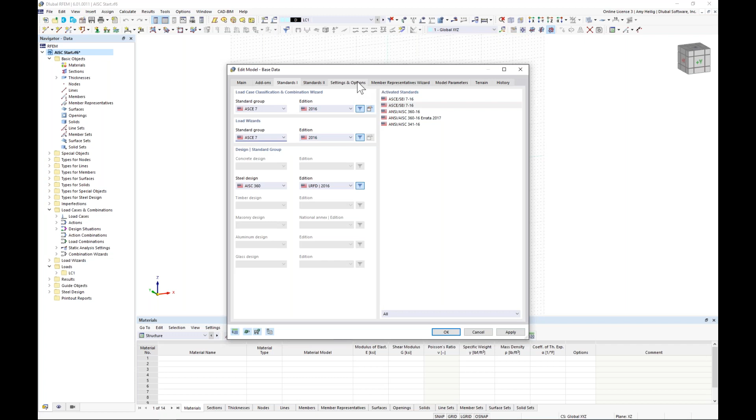Under the settings and options, this is where we can orient our global and local axes. Both are set to upward. I've also activated here the member representative, which gives us the ability to group together members with common materials, cross sections, maybe member lengths. This will come into play a little bit later on.

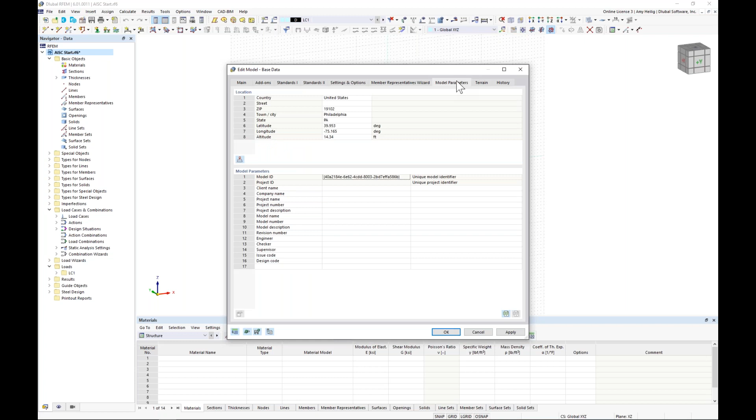Finally, we have this model parameters, which gives us the ability to integrate with our GeoZone tool available on our website. For those of you not familiar with the GeoZone tool, what this does is integrate the various standards, including the ASCE 7, the NBC standard, and many other international standards for snow, wind, seismic, and tornado loads.

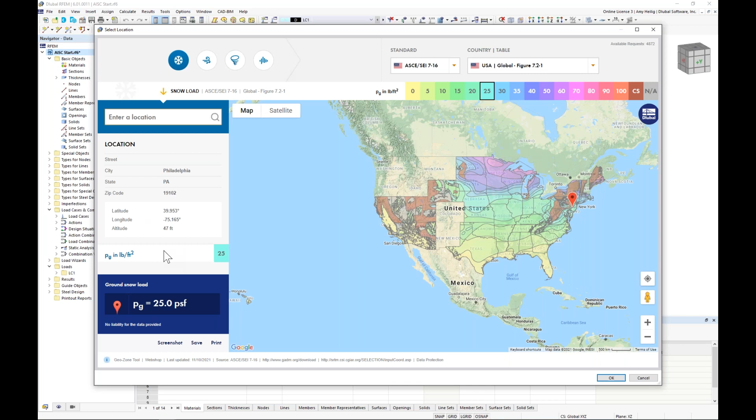This is also further integrated with Google Maps technology, so we can simply type in our project address here. You'll notice I typed in Philadelphia, PA, and I have my ground snow load automatically given to me based on the maps provided within the ASCE 7. This will be used a bit later on for our automatic snow load generator.

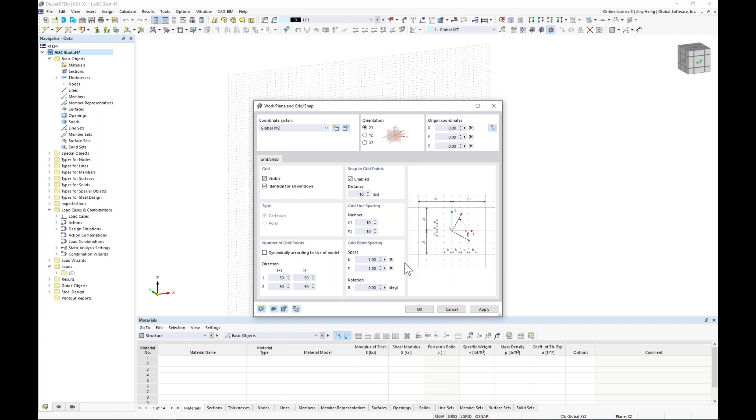Once we have set all of this input, we can go ahead and click OK to be brought into our model. Within our graphical interface, I have my drawing grid activated. Down here at the bottom, I can right click to edit this drawing grid. The grid point spacing is set at every 1 foot. If we see anything other than this, we can always click down here to set the default back to the 1 foot spacing.

We'll begin by drawing our first member, going up here to our toolbar to draw a new single member. The member type will be set to beam. The section will be defined here within my cross-section library, so I can go ahead and activate my standard steel sections, and we'll use our filters over on the left to filter to the United States, the AISC 15.

And the W sections are now available to us here, where we can scroll down and choose a W14 by 48. So once I have my cross section selected, I need to create a new material.

In a similar manner, I'll open up my material database. I can again use my filters on the left to choose the United States, the AISC 360, and we see steel A992 available to us, which we can click OK.

Now this material is available for all members within the model. I don't need to redefine that material each time, I can just select it here within this drop-down box.

Once I click OK, I'm going to go back to this main tab here and deactivate the design properties. This is specific to steel design according to the add-on we previously activated, so we'll get back to this later, but for now I want to deactivate this option.

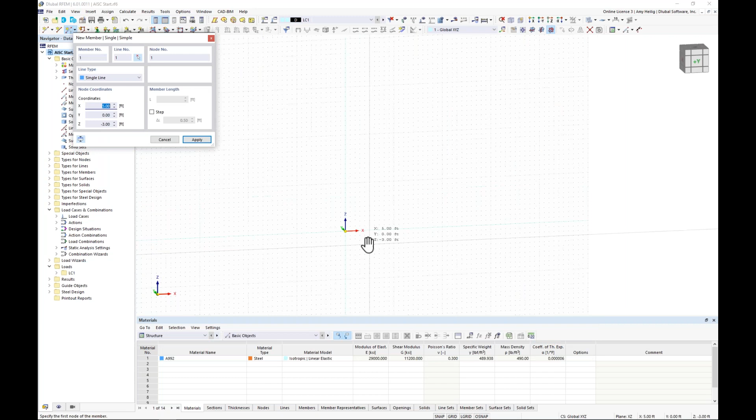We'll begin with our first column by snapping at the origin here and a point 14 feet in the global Z direction. My second point is going to be located at x equals 40 feet, and then we'll go ahead and choose again that same point of 14 feet in the Z direction.

Now I'd like to create a node that's really right at the center of these two nodes at the tops of my columns. For this, we have a nice feature within our drop-down box where we can create a node between two adjacent nodes.

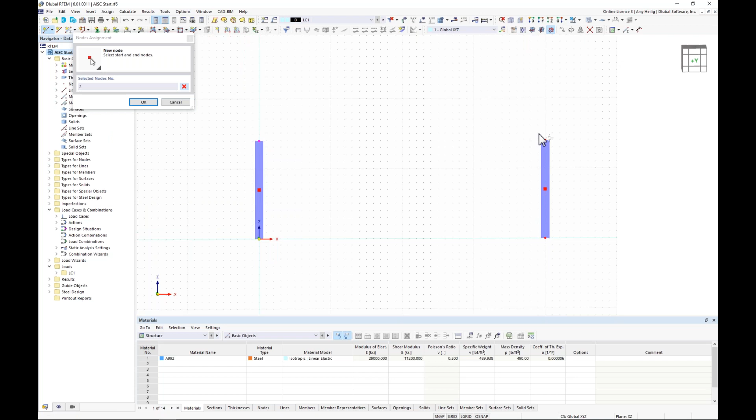So what we can do is graphically select the nodes at the tops of my columns. When I click apply, you'll notice we get a third node generated here. This node is really dependent on these two nodes that we've selected graphically.

I can even take this column and move it around and you'll notice that node moves with it. We can also take this node, double click on it, and you'll notice the node type is set between two nodes. If we want to edit it, we can simply change this back to standard and I can modify my Z coordinate to 16 feet in the vertical direction.

So we're now ready to generate our beams for our first moment frame. I'm going to go to draw a new member once again, and I'm going to deactivate the design properties.

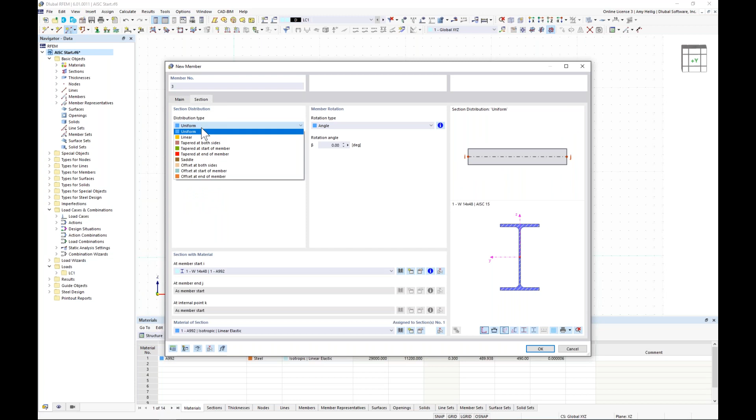Under the section, I'm going to choose under distribution type, tapered at the start of the member. Previously in RFEM 5, if we had any type of taper, we had to completely create a new member segment. But in RFEM 6, we have the ability to integrate this taper directly within this single member element.

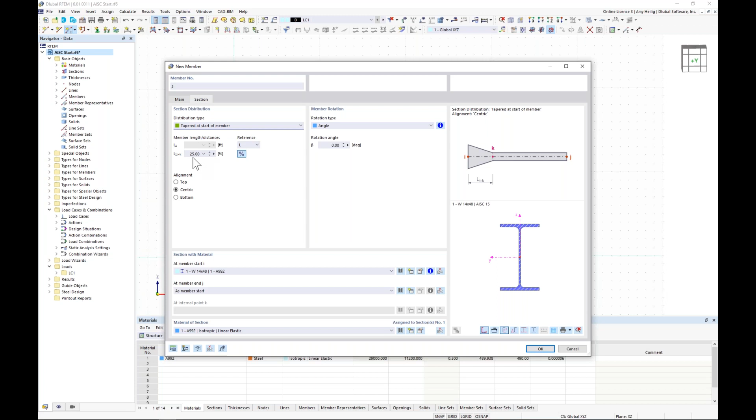We can set the member taper length, set at 25% by default. We can additionally set the alignment, so if I set this to top, notice that the top of member is completely flush here.

Well, we do need to create a new cross section. For my member, I'm going to go back to my W sections and scroll down to a W12 by 26. Remember, I don't need to define the A992 material again, it's already available to me here, and I click OK.

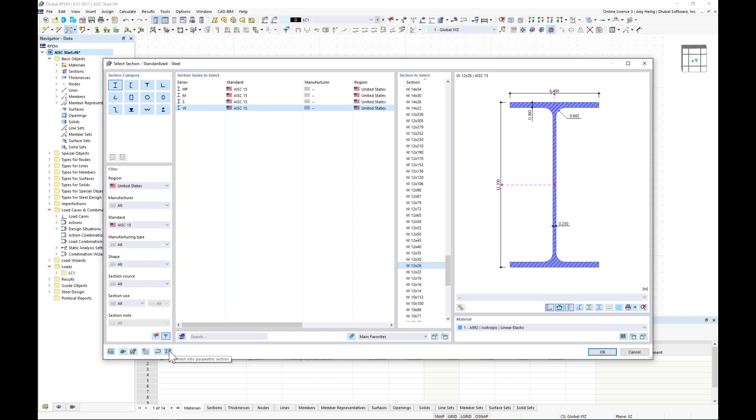But I also need to create an additional cross section for my taper start. So I go back to my cross section library and choose again that same W12 by 26, but we have a feature in the left corner where I can convert this into a parametric section. When I click this option, it imports all the cross-section properties from that W12 by 26, but I have the ability to modify any of the properties here, such as the depth, to 24 inches.

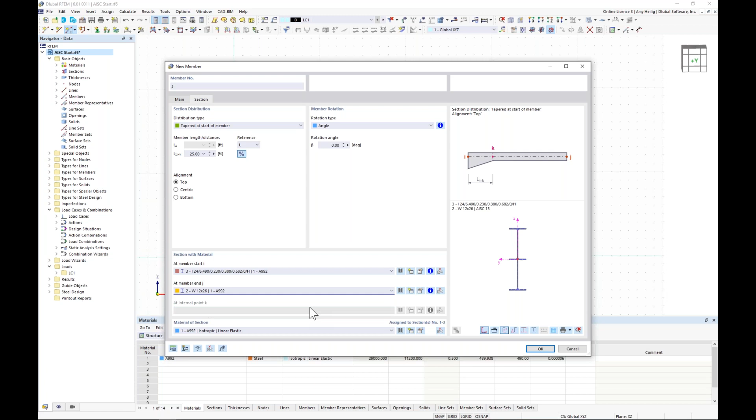I click OK, and once we click OK through this additional dialog box, we can set that parametric section as the member start, but at the member end I want to choose that W12 by 26 I previously defined. When I click OK, I start at the top of my column, and my second point will be up to that center point. I do the same thing on the right-hand side, and now we can see those beams generated with the taper available to us here.

These color codings are the member representatives. I'm going to turn those off for now, we'll get into them a little bit later. I'm going to highlight all of my member elements here.

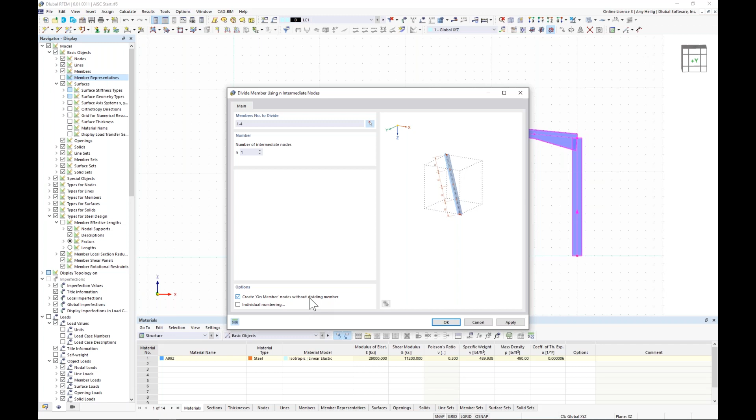I'm going to right click, and under the members option, I have the ability to divide the member by a set number of intermediate nodes. I'm going to create one intermediate node, and I'll choose the option to create the node along the member without actually dividing the member.

So that node will now be integrated as part of the member element itself. I click OK, and if we turn this into wireframe view, we can see these nodes in a different color, blue here, generated at the midpoint of each element.

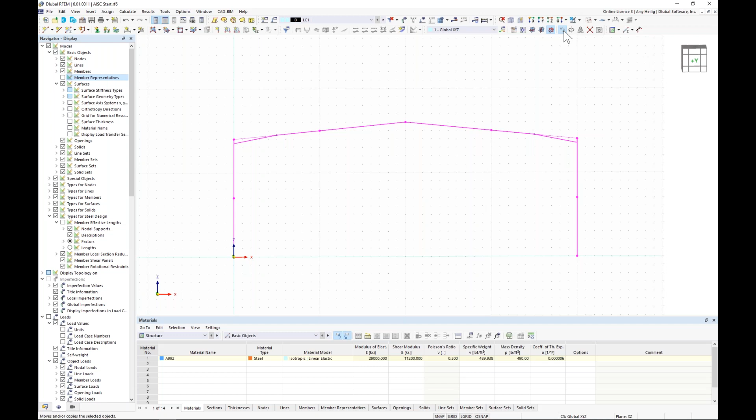I'm going to highlight all of my elements here, including those new nodes, but I'll hold down my shift key to deselect the nodes that define where the taper start should begin. I'm going to utilize my move copy tool and create a copy. We'll create 3 total copies in the global Y direction of 16 feet.

Under the numbering and options, we have the ability to turn on the step links. When we do this, we get a new tab that allows me to create members between copied nodes. So this is just a little bit of a time saver here.

Now, if I don't have the available cross-section I'd like to use, I can simply create a new one. This brings us into our familiar dialog box for creating a new member element. Turning off the design properties, the member type here is going to be truss. A truss applies that moment release at either end of the element, so internally you can see this hinges option is now grayed out.

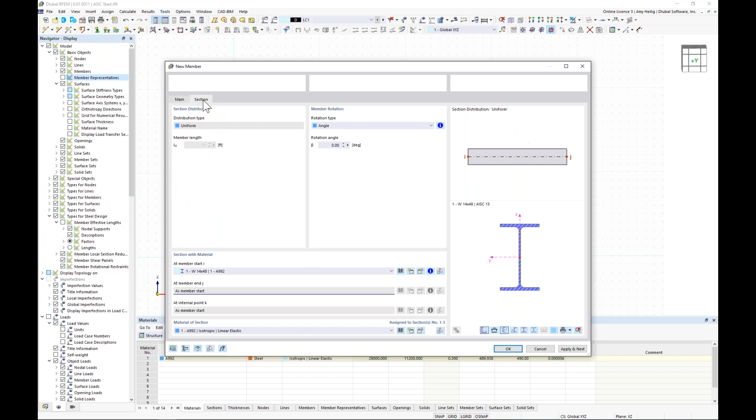Under the section, we will create a new cross section, and we'll go into our cross section library, but this time we'll choose an HSS. We choose the square HSS, and we'll scroll down here to 6 by 6 by 0.375.

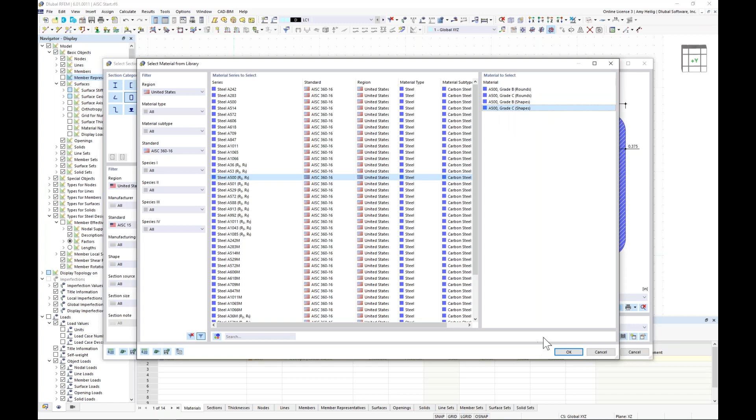Now I do need to create a new material, so I access my material database, and we simply choose steel A500, and I'm going to choose A500 grade C for shapes on the right-hand side. I click OK through these dialog boxes.

And remember, we're still in this move copy tool. So once I click OK, what I should see here are those HSS elements generated between those copy nodes.

Now, one thing I want to do down at the bottom is hold down my control key to select all of these bottom HSS elements. I'm going to double click, and I'm actually going to change the member type here to coupling hinge.

So this is actually some type of rigid element here. The stiffness is very high. We don't need to specify a cross section or a material. All of that's handled internally with a very high stiffness, and a hinge is simply going to release the moment at either end.

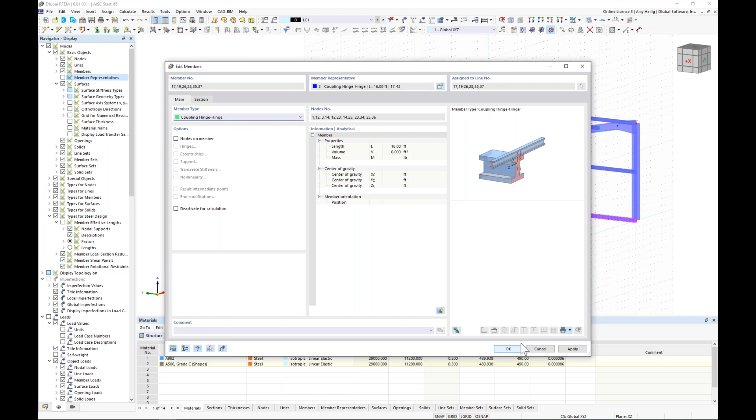The reason why I'm doing this is we will be defining surfaces for the facade walls for the entire structure, and I want all of the loads at the lower part of the structure to be transferred back to the bottom of my columns and into those foundations. We'll see that once we generate those surfaces.

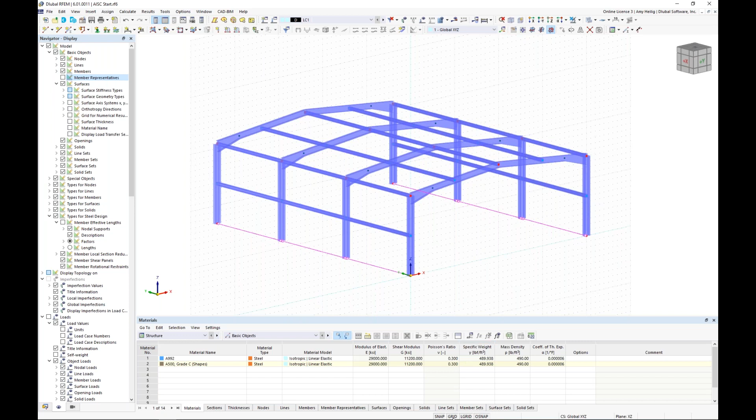So I'm going to continue on here to draw my X bracing now. I will go ahead and draw a new member once again. The member type now is going to be tension only.

Tension only again is going to apply that member hinge at either end, and additionally, if there's any compression within this element, it will be completely removed from the calculation, so it can only take tension forces.

We'll turn off the design properties, and under the section tab, we create a new cross section. I could either choose that here under my parametric bars for my X bracing, or additionally, we have bar sections here according to the AISC. Same concept.

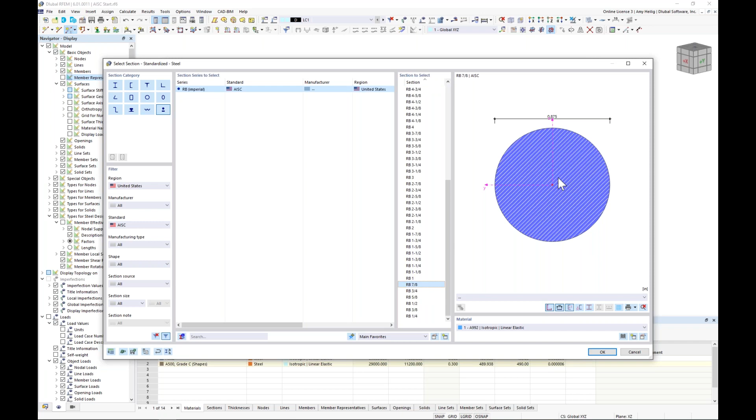This allows me to choose a 7/8 inch diameter round bar. Creating one more material type, I do want to select A36 for this element.

So once I click OK through these dialog boxes, what I can do here is turn this into wireframe view, and I can snap from one corner point to the other. You can see I slightly missed that one, but no problem, I'll fix that in just a minute. And then we can do the same thing up here at the top of the structure.

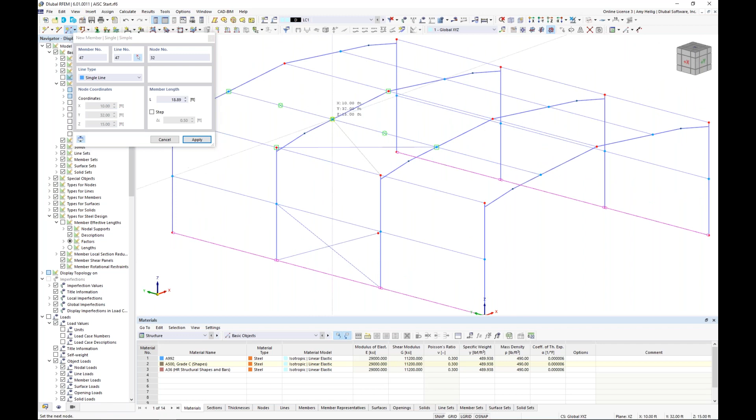Fixing this point up here is really just as easy as dragging and dropping, and that will snap to that point. Now selecting this lower X brace, I can hold down my control key to drag and drop and make a copy here as well.

Now we can do the same thing at the top. I hold down my control key, drag and drop, and make a copy. Additionally, I can select all of my braces here by holding down my control key on the left side.

and take advantage of my mirror tool. The mirror tool is similar to something we'd see in AutoCAD, where we can create a copy. We'd like to mirror about the YZ plane, and I'm going to choose my mirroring point, which will just be right here at the center of the structure. And I click OK, so now we can see that X brace generated on the other side.

It looks like one was additionally forgotten here, but no problem. We'll go ahead and drag and drop that down to the bottom element there.

Now that our X bracing is complete, I'd like to finish the front and rear of this structure with additional columns and wall girts. We'll turn back on our drawing grid, and I'm going to snap the drawing grid origin to a new location, which I can do with this option up here in my toolbar. I choose this point where my HSS intersects this tapered girder here at the end.

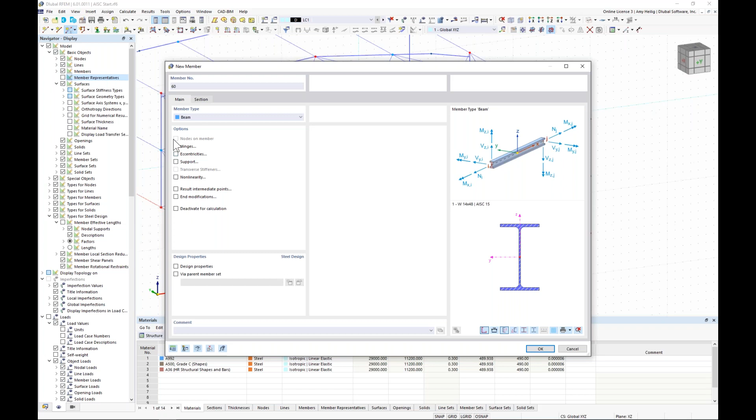My additional column will require me to generate a new cross section one last time. We'll turn off the design properties, and I'm going to turn on my hinges here. Under the section, I'll go back to my cross section library and choose a smaller section, a W8 by 31. A992 material is good. I click OK.

Now, under the hinges tab that we've activated, everything for a beam element is considered fully fixed. So if we'd like to apply a moment release, we need to create a new member hinge at the member end. I go in here to create a new member hinge type.

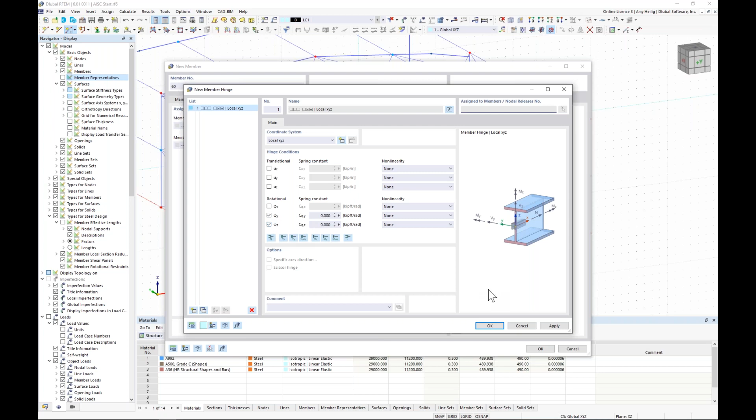We can see our six degrees of freedom. The program automatically assumes we'd probably like to release the moment about the local Y and local Z axes, so I can go ahead and go with that suggestion. Now this member hinge definition type is always available for any future members within this model.

I do not need to redefine that here, but rather just select it from my drop-down box. Once we're done, I click OK, and I'll snap from the bottom of the structure up to the top. So this is my front-facing column here.

I'm going to take these two elements, hold down my Control key, drag and drop to make a copy. Now, of course, we want to snap these members to this column that I just created. What we can also take advantage of is our object snap settings.

So down here in the lower right corner, if we right click, we see a lot of options, again similar to what we'd see in AutoCAD, including the perpendicular. This allows me to take this node here, and the program will automatically detect the perpendicular point and allow me to snap exactly to that element.

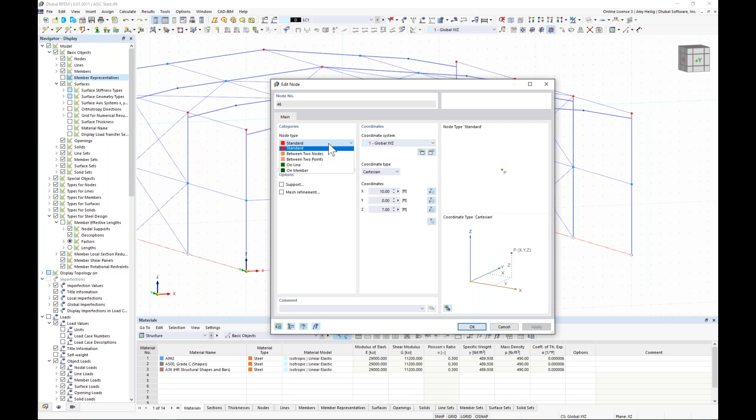Now for the bottom girt element, it's really just as easy as snapping to that bottom node. But we have one small problem here: this node is not detected along this member length. So we can simply fix this by double clicking on the node and changing the node type to on member.

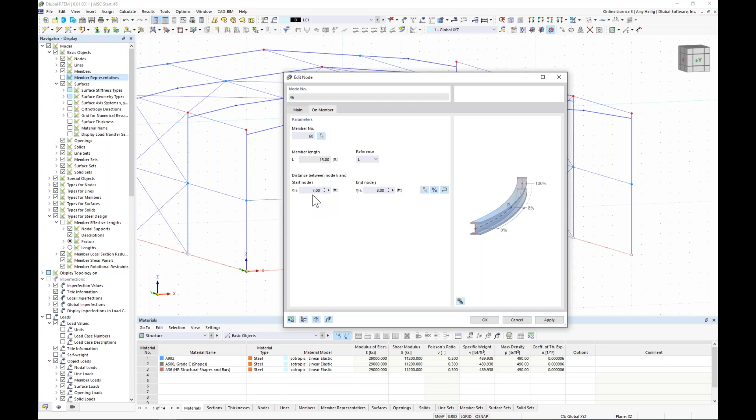On the second tab, the program tells me okay, we'll go ahead and choose the member it's associated with, so we'll choose graphically member number 60. Then I want to tell the program graphically as well where this node along the member should reside. We can see here that is set at 7 feet. I click OK, and now that node has changed color to blue.

I can take all of these elements and make additional copies here for the front of the structure. And I'll go ahead and take these two final elements, hold down my Control key to make my last copy.

Now up here, we do need to connect this column up to the node, so we just drag and drop and everything is complete at the front of our structure. Now I'm going to highlight all of these elements here, including the nodes, the rigid elements down at the bottom.

I hold down my Control key, and I can drag and drop to make a copy at the rear of the structure.

So most of our member modeling is complete, but now what I'd like to consider are our facade walls. I'm not interested in modeling these facade walls with a set material and thickness and designing them. I'd rather use them to transfer loads back to my members.

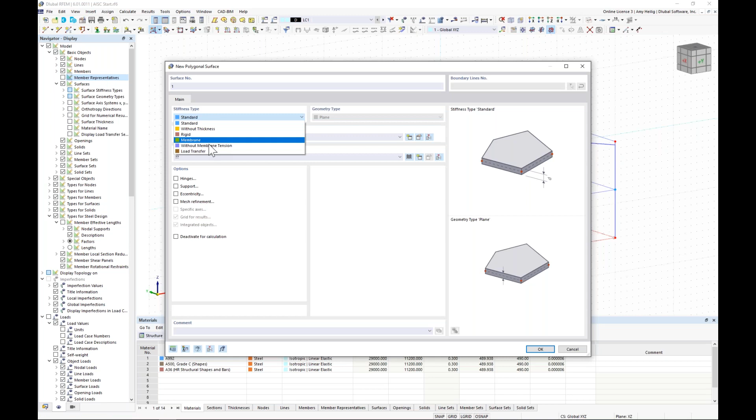So we have a new feature within RFEM 6 where if I use my drop-down box to draw a new surface, I can choose a polygon. The stiffness type can be set to load transfer, so notice I'm not going to be able to select a material or a thickness. It's really only used for load distribution.

Under the second tab is where I can select whether this is one-way or two-way area load distribution, based on the local axes of this surface. So we'll go ahead and select one-way area load distribution in the local X direction.

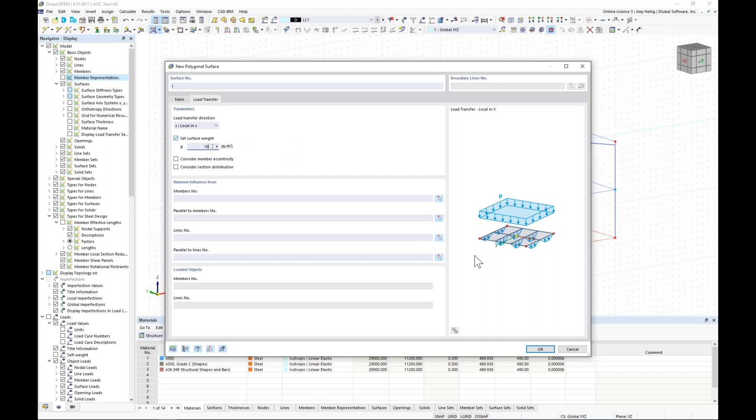Additionally, I can set a surface weight for these facade walls. If I want the self weight to be considered within this model and within the static analysis, I can go ahead and set 10 pounds per square foot for this new surface type.

So what I want to do is snap to the coordinate points of my surface for my front wall. I'll turn off my drawing grid at the bottom to make this easier. Currently in a rendered or wireframe view, it's a little difficult to see these surfaces - you'll notice only a dotted line is created. Every time I'm closing the surface with that final point, I just double click.

We'll go ahead and generate the surface at the left side of the roof here, and then we have one more surface to generate at the back.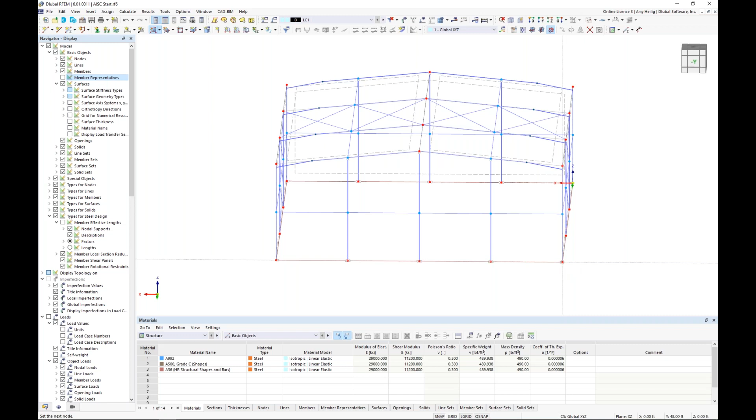Once we are complete with this, just to give you a better sense of what's going on, we can turn this into a rendered view. Here are all of these surface elements, again with no stiffness, just being used for load distribution.

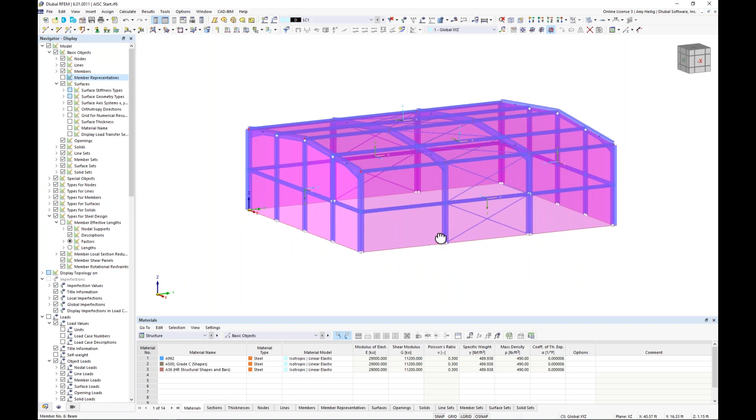I also like to right click and turn on the local axis system of the surfaces, because I'm choosing a one-way area load distribution. I wanted to ensure all my local X axes are in the horizontal direction, and they are. So we can right click and turn off that local axis system.

The final thing to do is to support the structure. So we go up here to a new nodal support. Within this option we have several defaults, such as a pinned support, a fully rigid support, roller supports, or we can always create our own.

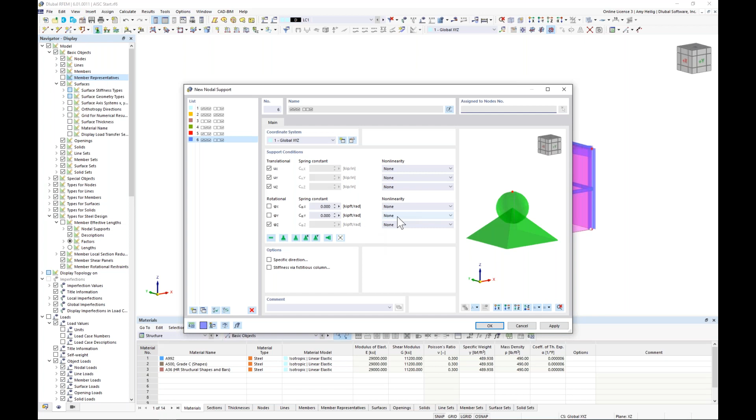When we create our own, we have 6 degrees of freedom, 3 in rotation, 3 in translation. We can set partial fixity with spring constants or non-linearities. So let's say we want it to fail in uplift - this is possible, along with sliding and friction. We can define those with non-linear options.

For today, I just want to choose the default pin option, and I click OK. This allows me to highlight over the bottom of all my elements to apply that nodal support at the base of each column.

I can also right click on these supports, and you'll notice we have a nice slider where we can decrease and increase the size. Once those supports are generated, our modeling is really complete.

So I want to move into the definition of the load cases themselves. We go up to edit our load cases, and you'll notice we already have a default load case set. I'd like to give it a load case name of dead load, and self weight is automatically turned on - the self weight of our members, and remember we set that self weight for our facade walls, for the load transfer surfaces.

The action category here is set according to ASCE 7, so the program knows which load factors to apply to each load case. We leave this one as dead load. We create our second load case, snow load, with the action category of snow - notice self weight is turned off here. And we create our final load case, wind in the positive X direction, with the action category set to wind.

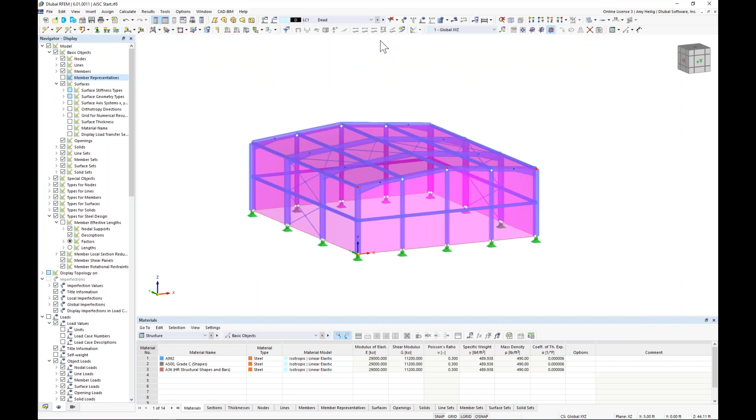So we've generated these 3 load cases here within our dropdown, but we actually need to apply the loads to the structure. For my dead load, I really don't want to apply any additional loads other than self-weight, except for pre-stress of these X-brace members.

How I can do this is to go into my project navigator, and we have a nice feature here within the Views tab that allows me to select members by type graphically, and I can choose my tension-only members. Notice everything else is grayed out, and this gives me the ability to select all elements here, which will be only my X braces.

We can begin by drawing our first load within the structure. I'll go up here to draw a new member load. The load type is going to be axial displacement for that pre-stress, and the load magnitude will be negative 0.01 inches in the local X direction. When I click OK, that load is automatically applied to all of these tension-only members, and we can see that graphically shown to us here.

So once we're done with the dead load case, we want to move on to snow load. And I previously mentioned that we do have our snow load generator available to us according to the ASCE 7. This can be seen under the load wizards tree within our project navigator, and we'll see here snow loads, which I can double click to create the snow load generation.

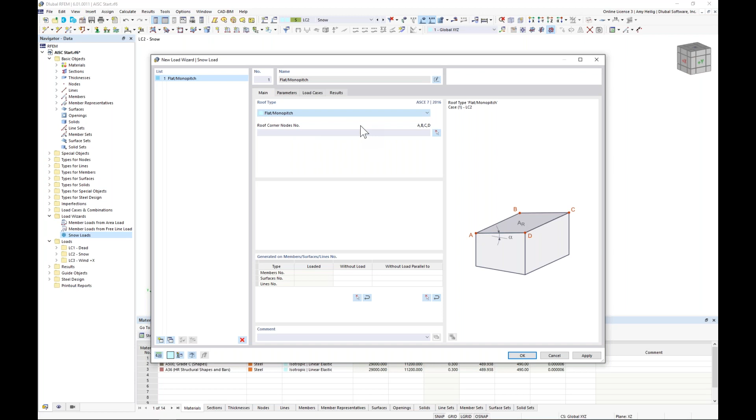Now, the roof type can be flat, monopitch, or dual pitch. Anything outside of this basic rectangular shape, these snow and wind load generators cannot be used, so you will have to manually apply those loads instead. But for today, our structure does fall within this geometry.

So then what we can do is to select the roof geometry graphically here. I go around and I pick each of these 6 points. I double click for my last point, and now the roof geometry is recognized here within this dialog box.

Under the Parameters tab, remember we have already set the project location according to the GeoZone tool back when we first created the model. So inevitably the address is shown here, but we're also bringing in that ground snow load directly from those ASCE 7 maps. So nothing to do further here.

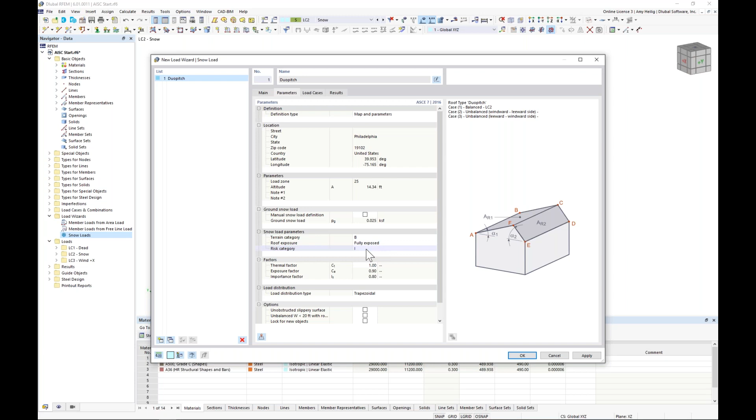Now I may want to make some adjustments according to the terrain category, the roof exposure, or the risk category, because as we know, this is going to affect the magnitude of my snow loads. We'll just go with the default options for today.

And under the third tab, we have the ability here to generate the balanced snow load cases, but also unbalanced. So for our simple example today, we'll just create the balanced snow load. The program is intelligent enough to go ahead and place this under load case 2 for snow load.

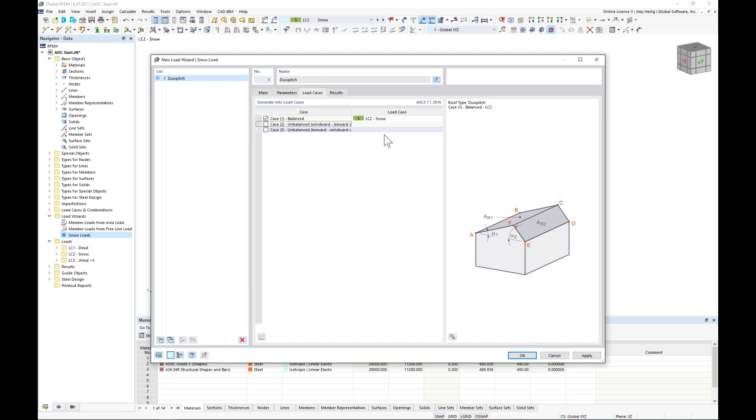So when we click OK, what we should see now is a new generated load at the top of our structure. We can right click to display this load separately, and under my project navigator within the display tab, up at the very top here, I have my basic objects for surfaces, and here is where I can turn on the display of the load transfer separately.

So the surface load is being applied to those surfaces. When I turn on this feature, the program's showing me based on the tributary area how exactly that load is going to be distributed to each of these moment frames. And by the way, we can also go back to the dead load to see the same concept for that self weight of that 10 pounds per square foot that we applied to all those surfaces as well.

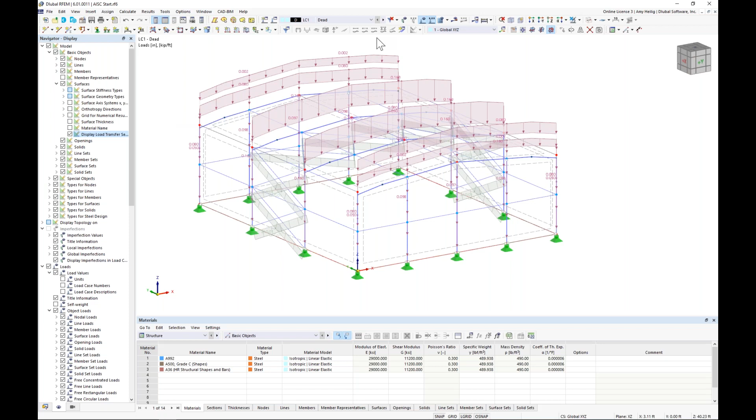So now we are complete with our simple snow load case. We'll move on to the wind load. And as mentioned, the wind load is still in development according to the ASCE 7, so it's really as easy enough as applying some simple surface loads here to represent that wind in the global X direction.

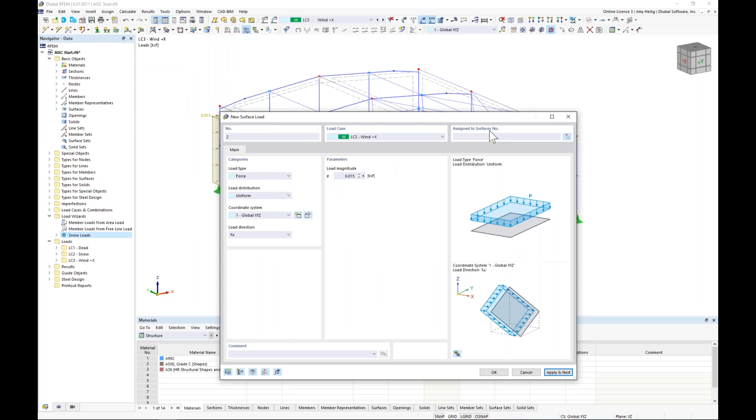So we'll start off with a new surface load up here in my toolbar, and we want to set the load magnitude as 0.015 kips per square foot in the global X direction. We can see my global axes down here in the lower left. Now I want to assign this to my first surface over on the left, surface number 4. If I hit apply and next, notice I'm still within this dialog box, but that load has been applied in the background.

So this gives me the ability to modify my magnitude for a small section force, but I'll apply this at the rear facing wall here. I click apply and next. We should see that load generated in the background.

I further adjust my magnitude to negative 0.008 kips per square foot, but this time in the global Y direction. I'm going to choose this front-facing surface for an interior section load as well. I hit apply and next. We just remove this negative sign for my surface in the back. I click OK, apply and next.

Now the final load is going to be the same magnitude, but this time we want to change the coordinate system to the local X, Y, and Z axes. So this will be applied based on the local axes of my roof surfaces here. Since they are at an inclination, I want this wind load to be normal to those faces. So we set this according to the local Z axis for these surfaces, and then I can graphically select the 2 roof elements here. I click OK, and now we're finally done with our wind in the X direction.

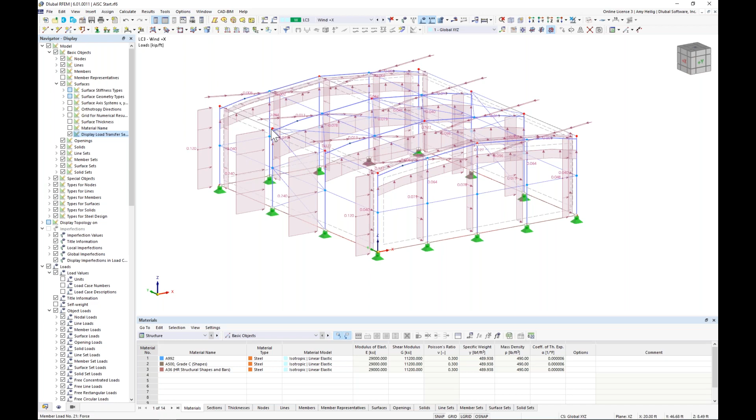Now again, we can go back to displaying the load transfer separately here. This is just based on the tributary area of all of our elements, since those are surface loads applied to the surface load transfer elements.

Okay, so now that we are done with wind in the X direction, I'm going to go back to my project navigator, and I can view my load cases within my additional tree settings here. So I expand out the load cases and I see dead load, snow load, and wind in the X.

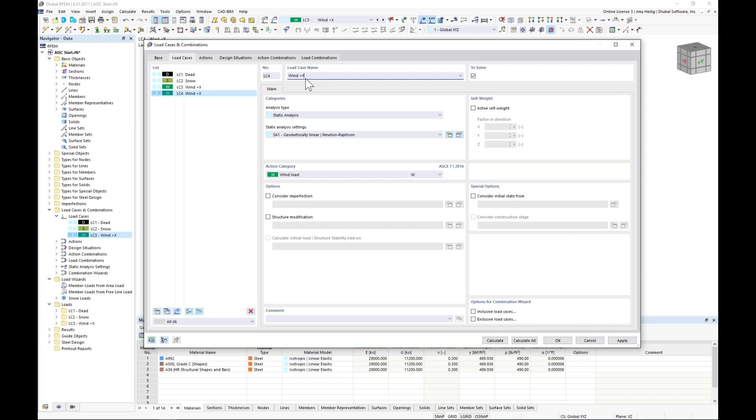Well, I can right click on wind in the X and choose this quick option here to copy the load case. Immediately my dialog box opens up, which we've seen before, and I can just change this to wind in the Y direction. The benefit of this is that wind in the Y direction has also copied all of those same surface loads, so I don't need to redefine those.

All I need to do here is adjust the magnitude. Now I could adjust the magnitude by clicking on each one of these surface loads, or we can also take a look at our load input data directly within our table options down here at the bottom. So I use my drop-down box to select loads, and I'll find surface loads down at the bottom.

So under wind in the positive Y direction, I just want to make some small changes here to my magnitude: negative 0.008 for my left facing surface. We'll go ahead and change this to positive 0.008 for the right. Now this front facing surface, this is where a majority of my wind load magnitude comes from, so we set this to 0.015 in the global Y. And then we're going to modify the rear surface to 0.006.

Nothing to do further with my roof elements, those we can leave as is. So essentially all of our loading is now complete for our 4 different load cases that we have available in our drop-down box here. So now the next topic to discuss, we'll jump back to the PowerPoint here to turn back to the AISC 360 Chapter C, Design for Stability.

And within this chapter, section C1, there are 5 requirements listed. The first is flexural, shear, and axial member deformation. The second is that second order effects, including big P delta and little p delta, must also be accounted for when we're designing for stability. Geometric imperfections should be included, as well as stiffness reduction due to inelasticity, and finally, uncertainty in stiffness and strength.

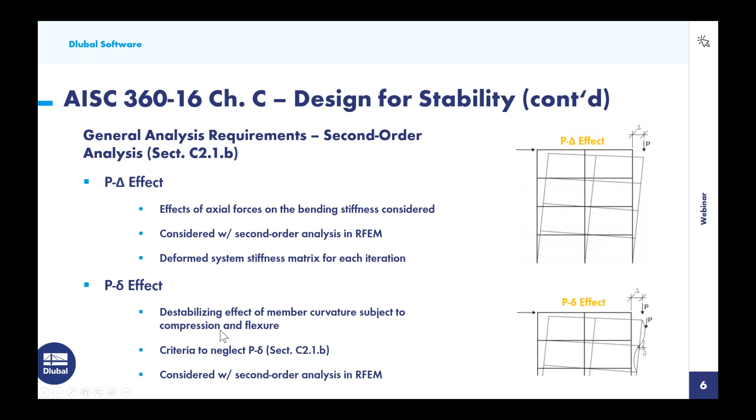I'll show you in a minute how we can apply those settings, but let's continue with item number 3, the consideration of initial system imperfections according to section C2.2. When we're talking about buildings, this is primarily column out-of-plumbness. Member out-of-straightness doesn't need to be addressed within chapter C for instabilities because it's already considered within chapter E when designing members for compression.

There are two approaches for considering imperfections. The first is direct modeling according to section C2.2a. The code tells us we can physically model these initial displacements due to loading and anticipated buckling mode shapes. The magnitudes are based on tolerances set forth within the code of standard practice or on the known imperfection itself. So if we wanted to alter the geometry of our model to account for those initial displacements, that is one way to handle imperfections.

Probably the alternative and easier approach is the use of notional loads, given to us in section C2.2b. The equation directly from the standard is 0.002 alpha times Yi. Alpha just depends on whether we're going with LRFD or ASD limit state design. Yi is the factored gravity load at that particular level. From this equation, we calculate the notional loads that should be applied at each level.

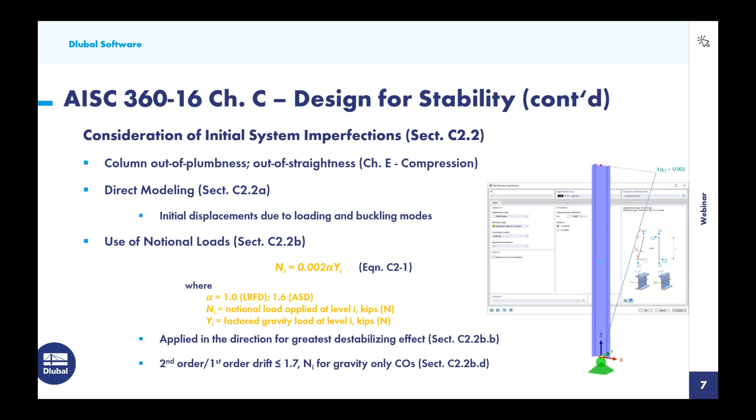Now, the final topic here is item number 4, adjustments to stiffness in section C2.3 to account for inelasticity.

The first requirement is to apply a 0.8 factor for axial and flexural stiffness. Now, this should be applied to all members that contribute to the stability of the structure, but the code goes on to say, well, in order to avoid artificial distortion, just go ahead and apply this factor to all members within the structure.

Similarly, we have an additional tau sub b factor that should be applied to the flexural stiffness only. And tau sub b is a little bit more complicated. We can see the equations listed here, again, directly from the standard.

Tau sub b is dependent upon the required factored axial compressive strength, or what is the demand normal or axial force within the member from the analysis, but also what is the cross-section compressive strength, or what is the capacity of the member. Depending on what this ratio is, if it's less than or equal to 0.5, then it's easy enough to set tau sub b equal to 1.

Now, when this ratio is greater than 0.5, we have an equation that we need to follow here to correctly calculate tau sub b. And furthermore, what's new within the 2016 is that we do need to account for both non-slender and slender elements. This does affect which area we'll use here, whether it's the gross area or the effective area.

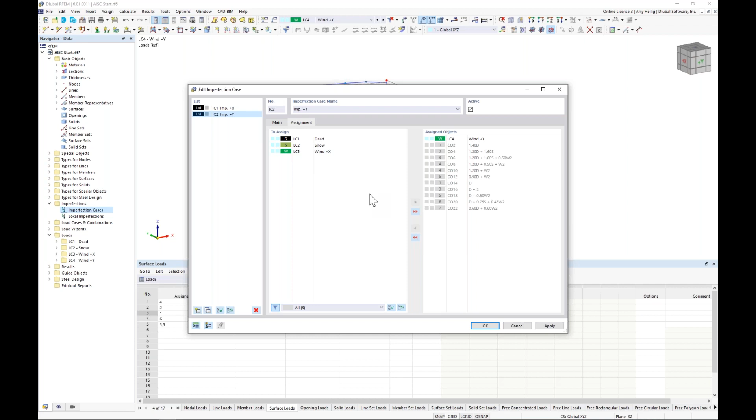So now that we have generated these imperfection load cases, we actually need to apply the imperfection to the structure. So we can do this by go ahead and clicking OK here. And before I do, I'm going to take advantage here again of my visibility options to filter the members by cross section.

And I'm going to choose my vertical elements here in the vertical direction. So you can see my W14 by 48 and W8 by 31. Now I can also right click to turn on the local axis system of the elements because this is important for my imperfections. So under my imperfections tree here, we can now see that we have imperfections in the X and we have imperfections in the Y.

So under imperfections in the X, I'm going to right click to create a new member imperfection. And under the definition type, sure enough, we have available here the AISC 360-2016 standard.

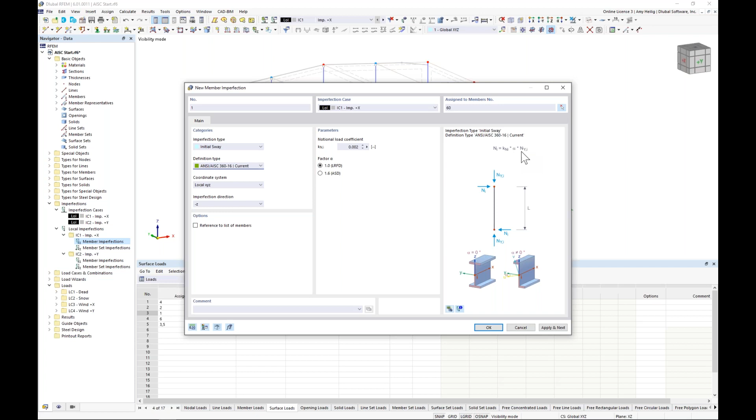And we're going to see that exact equation that I showed in the PowerPoint given here of 0.002 times alpha times yi. Now we want to apply these imperfections in the global X direction, which relates to the negative local Z axes of all of my members shown here.

So then I can graphically select, let me pull down this table. I can graphically select here all of my vertical members. I click OK, and now we can see all of those populated here. I can click apply and next.

Now I can choose under my drop down here imperfections in the Y, and all I need to do is change the imperfection to the positive local Y axis. Again, that's going to correspond with the wind in the global positive Y direction. I'm going to graphically select all of my vertical elements here once again. I click OK, and I can click OK once again.

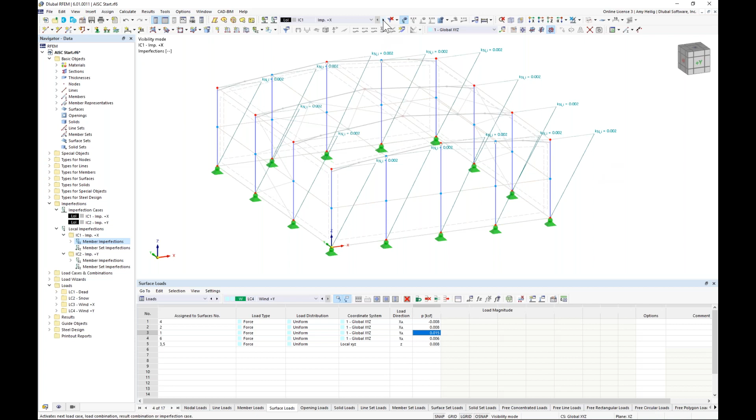Now, what we can see when I turn off my local axes is our imperfection cases available in our drop-down box now, and we can graphically see these by turning on the imperfections up here in the toolbar. Here is our column out of plumbness, or our notional loads applied in the X direction, as well as applied in the Y direction.

So once those imperfections are applied, I just want to go into a little bit more detail about how the imperfections should really be applied to each load combination, because this can be a little bit complicated. So let us jump down to, let's say, our dead load here, and we can go into our load cases and combinations, which we've been here before.

But under the design situations, the program is automatically generating two design situations according to the ASCE 7. We have here our LRFD design situation, which is going to be our factored load combinations, and ASD, which is going to be our unfactored load combinations.

Now, within the LRFD design situation, you can see here it's active for steel design. So I'll be using this for the steel design add-on according to the AISC in just a minute. We have these options down here specific to each design situation. So I'm going to go into the edit detail settings.

It's important to know that all of the direct analysis method settings that we talked about in the PowerPoint are all controlled within this dialog box. So that's kind of nice that we don't need to jump around to all different areas of the program, but we're going to set everything here.

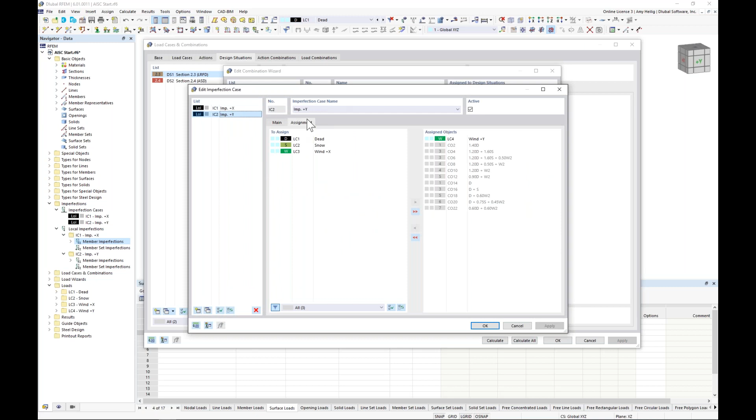The first is to turn on the imperfection cases for my factored load combinations. You can see that's automatically checked on by default. If I go into this edit button, this just brings me back to the imperfection cases that I've already seen before. So imperfections or notional loads are now taken care of.

Let's move on to a second order analysis accounting for big P delta and little p delta. Well, that's really just as easy as using this drop down box here. We see here linear analysis, but we want to set this according to second order P delta. So now big P delta and little p delta will automatically be accounted for all of my factored load combinations.

Now, the final topic is our stiffness modifications, and we can activate this here with the structure modification. Now, I do want to create a new option here, and I'm going to activate the modify stiffness for my members. I now get a new tab, and under the member modification, I use my drop-down box here to select new member stiffness modification. Well, within this drop-down box, we have the AISC 360, the 2016 available to us.

And we're going to see here tau sub B. When we have this set to iterative, it's going to take into consideration all of the equations for calculating the tau sub B stiffness reduction. Now, alternatively, we can set this equal to 1.0 if maybe we're applying additional notional loads instead. Now, we also have our bending stiffness multiplication factor here of 0.8, as well as the axial stiffness of 0.8.

So once we have defined this here within our stiffness modification definition type, we need to graphically select the members that this should be applied to. Remember, the standard tells us to go ahead and apply this to all members within our model, but notice I'm not applying it to the rigid elements down at the bottom. Those are not applicable there. So now I have created this stiffness modification here. It is turned on for my factored load combinations, and all of my direct analysis method settings are now considered.

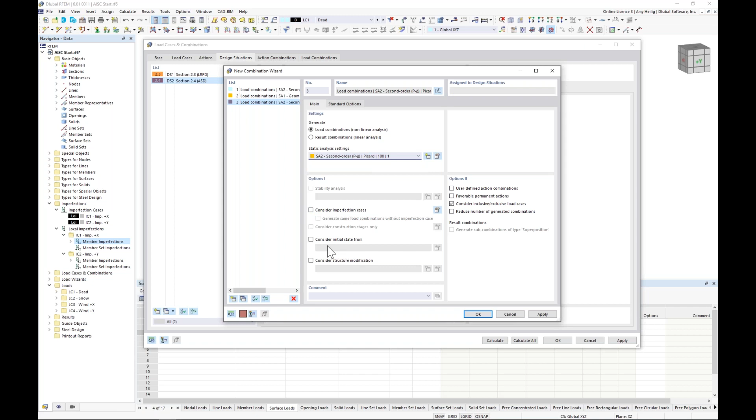Well, I can simply create a new option here. So we'll choose the new combination wizard option number 3. I'm going to select a second order analysis, but notice for this one, I'm going to leave off the imperfections and the stiffness modifications. So now within the LRFD, we're still referencing item number 1 here with those options set, but for my unfactored load combinations, we shouldn't see any of the stiffness modifications or notional loads applied.

Now we can confirm this under the load combinations tab, and here are all my factored load combinations, which we can see have imperfections and stiffness modifications applied. But if we jump down to the unfactored load combinations, everything's turned off. So now everything is set up accordingly.

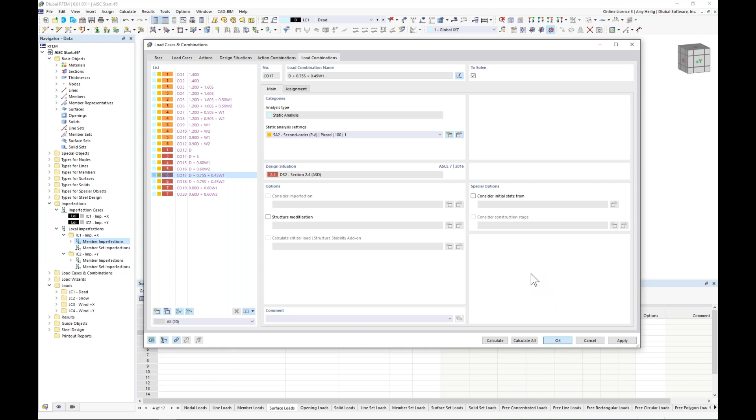Okay, so realistically, everything is ready for the full analysis calculation. But within RFEM 6, the huge advantage is that we now have integrated these design add-ons directly within the main program so that we can do both the analysis and the design at the same time. So let us switch gears now to talk about the design input for the Steel Design add-on that we activated at the very beginning of the presentation.

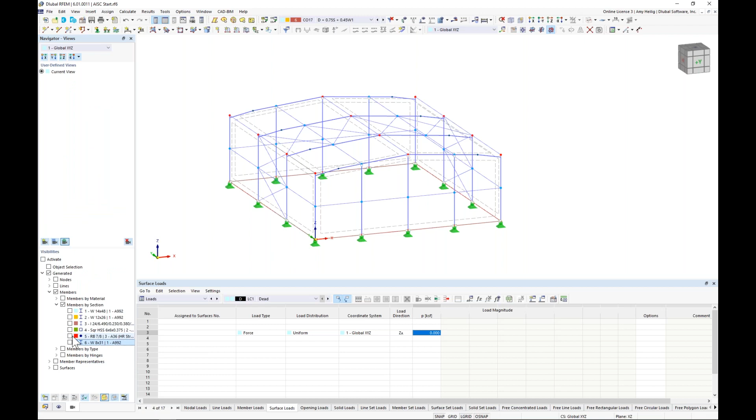So I really don't want to design all of my members. Now, realistically, of course, we'd probably want to, but for presentation purposes, I'm going to go ahead and use my visibility options here to only select those tapered elements up here along my main rafters for my moment frame. So I'm only going to design these elements.

Now, additionally, I'm going to turn back on my member representatives. So remember, I said that member representatives can group together similar elements that maybe have the same cross-section, the length, the material. So the program kind of recognizes here all these are similar.

The problem is I'd really like to create a new member representative for my 4 exterior elements here. So what I can do in order to divvy these up into a different member representative is just as easy as adding something like a comment down here for each one of these elements. And under the comment, I can type in here 'end moment frame', for example.

So when I click OK, what we should see, and I'll go back to my visibility, is a new member representative shown here in blue color. So now we have 2 different groups here just by setting a simple comment.

So let us begin with the design input, and I'll start off by selecting the member representatives on the exterior here, and I can double click on that colored box. Now notice that members 3, 4, 15, and 16 are part of this grouped member representative.

Well, if I go into the edit settings here for these individual members, remember we had turned off design properties for all of those elements. I'm going to go ahead and turn those back on.

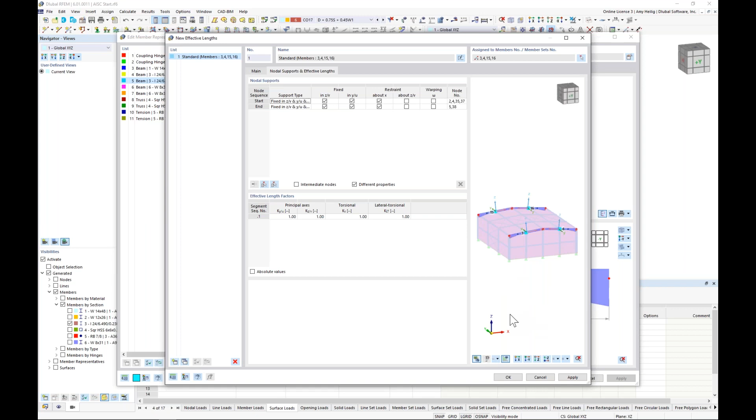The reason I select them is so that my picture down here will update. I like to see exactly where I'm at within this dialog box when setting these intermediate supports. So I'll activate the intermediate nodes, and have the program automatically detect where the nodes exist along the length of the member. Notice I now have a couple additional rows here.

The program automatically sets by default the member start and member end intermediate supports. Our second node here is really irrelevant - that just defines where the taper start and end should occur.

But the third node, if we rotate this around and zoom in, I'd really like to brace this element in the weak axis direction, the local y-axis direction. We also have this column framing up, so I'll assume the element is braced in the vertical direction as well. Additionally, I'll assume the member does not have the ability to rotate about its own x-axis, or torsion, so I'll brace that too.

Now my effective length factors are all set in my table down here. We know that if we're designing according to the direct analysis method, all of our K factors can be set to 1.0. So now that I've set these intermediate restraints, I can click OK, and I'll see these automatically updated here for my members.

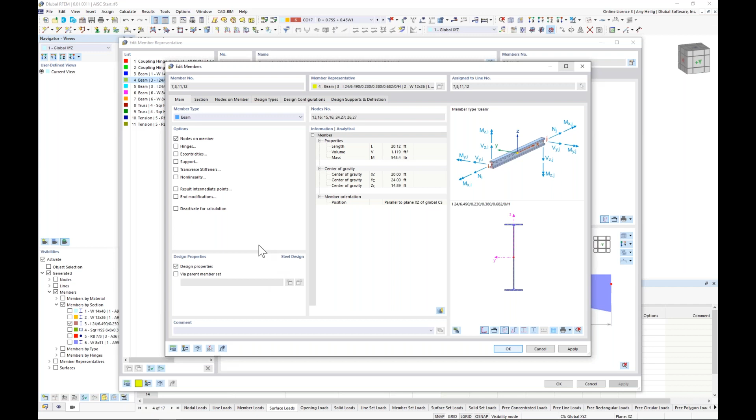Now I'm going to do the same thing for my interior members, but we have slightly different provisions. The first thing to do is go into my details settings, and we need to turn back on the design properties. I'll click OK to make these settings for all 4 members at once.

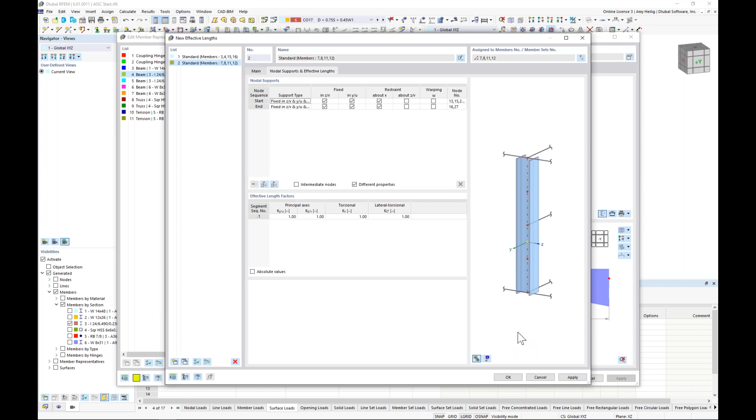Under the design types, I want to choose an effective length here, and we'll go ahead and choose the eigenvalue method. Under the second tab, again I like to graphically select these - not necessary, but it's helpful in determining where you're at along the length of the member.

So we're going to have the program automatically detect the intermediate nodes. Two additional rows are given to us here. Now this is slightly different - the first node we can leave as default.

The third node, I would like to only set the intermediate support in the weak axis direction, or the local Y direction. We don't have any additional columns framing up, so I can't say the member is braced in any other degree of freedom there.

Same concept for this middle node. I actually need to go back and adjust what the program automatically assumed, to brace this only in the weak axis direction, since we don't have additional columns framing up there either.

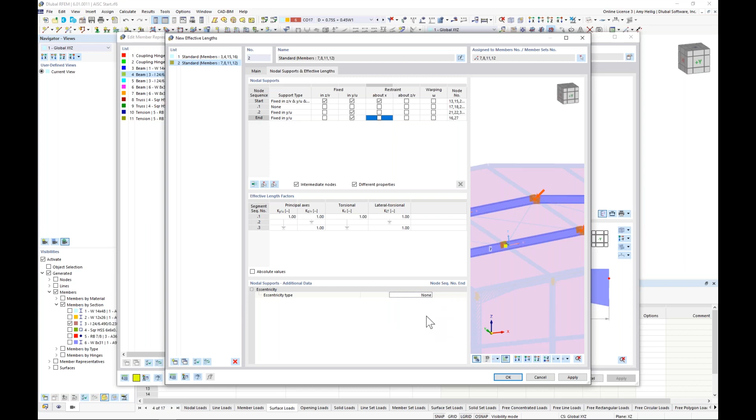Now, additionally, for these weak axis intermediate supports, if you want to brace them at only the upper flange or only the lower flange, you can set that eccentricity down here. Otherwise, it's going to assume that both the upper and lower flange are completely braced.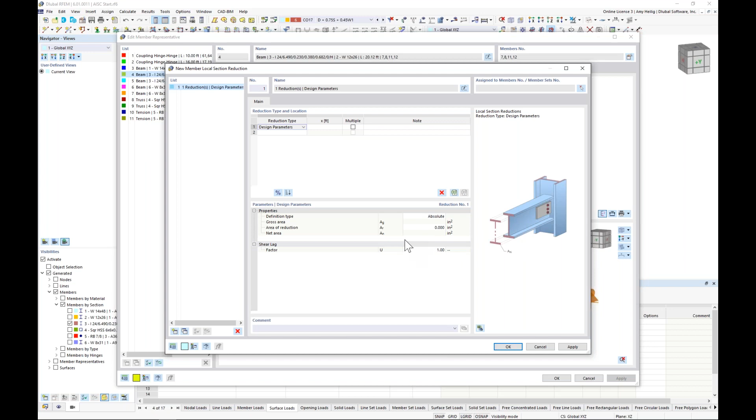So when I click OK, we're now going to see those intermediate supports set here. Now, to quickly cover some of these other settings - local section reductions - if we wanted to create a new reduction type here, you'll notice that if our cross-section area is really reduced, we can put that in here for the net area.

The shear panel and rotational restraint settings are specific only to the eigenvalue analysis approach, and this is for lateral torsional buckling. So if we had a continuous support for the member in the weak axis direction, we might place a shear panel on it. If we had a continuous support preventing the member from rotating about its own axis, again that's torsion, we could set a rotational restraint.

Within these options, you can see we can apply some different settings to ultimately calculate a spring stiffness for the eigenvalue analysis. So this may be something that you really don't get into too much.

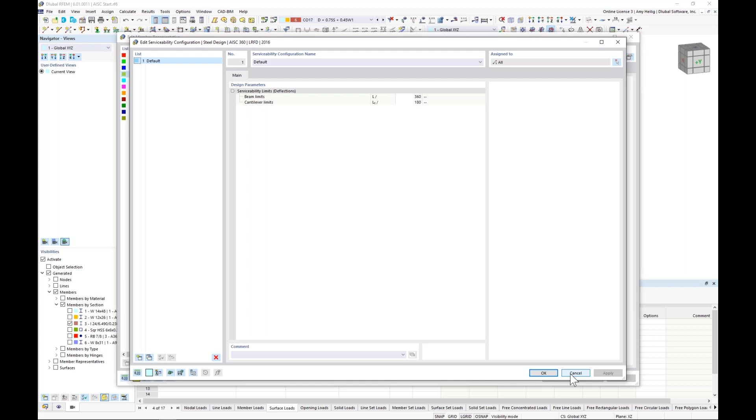The design configurations list strength and serviceability, and this is specific to the AISC. Under strength, there are just some different provisions, not too much going on here, so we can leave everything set as default. But under serviceability, this is where we would set our limiting deflection ratio - L over 360 for simply supported, L over 180 for cantilevers. We can make adjustments directly within this dialog box if we wanted to adjust the serviceability configuration.

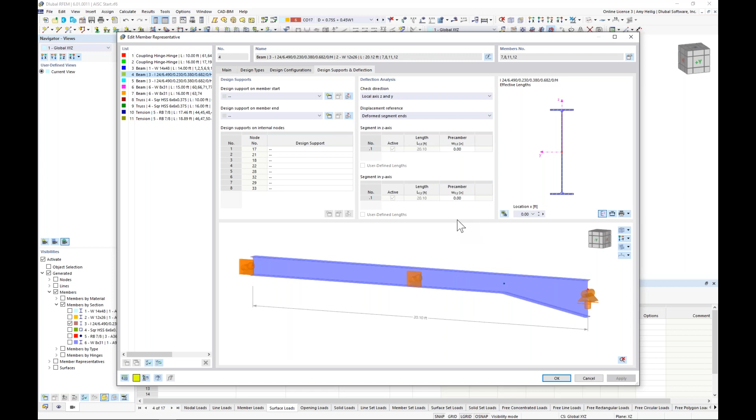Under the fourth tab, the program automatically assumes all elements are simply supported. If we have a cantilever, we'd want to define a design support at the member start or end, and the program will refer back to the cantilever limiting deflection ratios instead. Some additional settings here for deflection checks, but we'll leave everything as default for today.

Now that we've set those intermediate supports, under the project navigator we can expand out the types for steel design and turn on those intermediate supports, so everything we just defined is shown graphically here. Keep in mind this does not affect the analysis whatsoever, it's for design. So for unbraced lengths and lateral torsional buckling, this is what those intermediate supports affect.

The final thing to do is jump to our table and choose steel design from the drop-down box. Under this first tab are our two design situations. Remember, LRFD is our factored load combinations where we reduce the stiffnesses and apply notional loads. Then we have ASD, our unfactored load combinations we'd probably like to use for deflection checks, for example. The strength limit state type should be associated with LRFD, but my serviceability limit state design should be associated with my ASD load combination. So we make that change here.

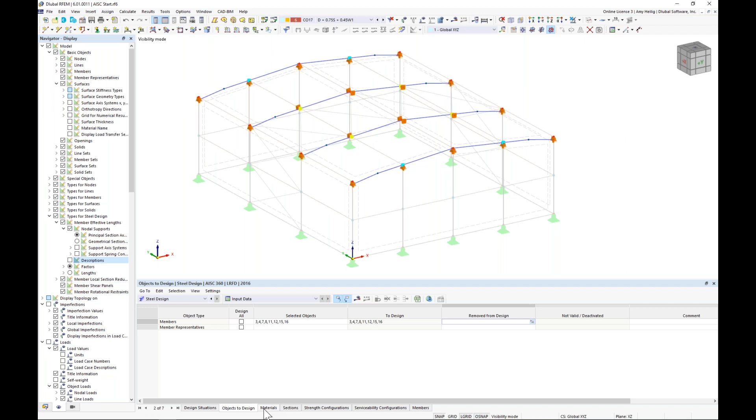Under objects to design, the program automatically assumes we'd like to design all objects. Let's turn this off. Rather, I only want to design these 8 members that I've set the intermediate supports for. I click OK. The additional tables here are just reiteration of our materials and cross sections, nothing further to do there.

I'll clean up my display settings a little bit, turn off these member effective lengths, and run our calculation by going to calculate, calculate all. The program will run through all of our load combinations at once with the multi-core processor, as well as our steel design. You can see this solves within a matter of seconds.

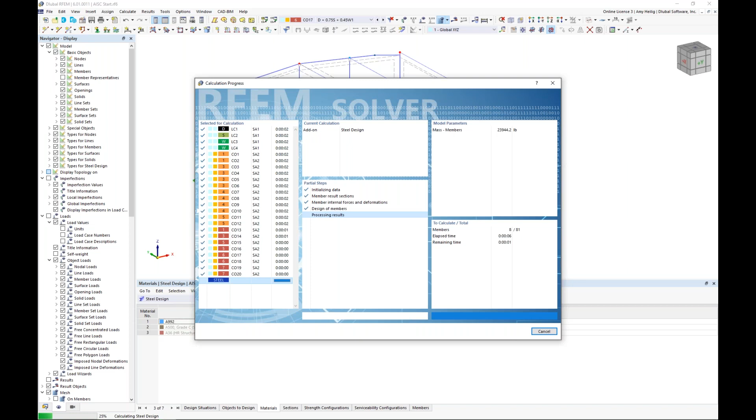Ultimately, we get an additional 4th tab within our project navigator for our results. Currently we're viewing the deformations of the structure, and we can see the deformations available within the static analysis. We can also make modifications to what we're seeing graphically, for example changing the cross sections to colored and scrolling through the different load cases and combinations just to make sure everything looks as expected.

In addition to deflections, we're probably very interested in the member internal forces. We can see axial forces, view shear forces, maybe bending moments in the strong and weak axis direction. So everything is shown to us graphically.

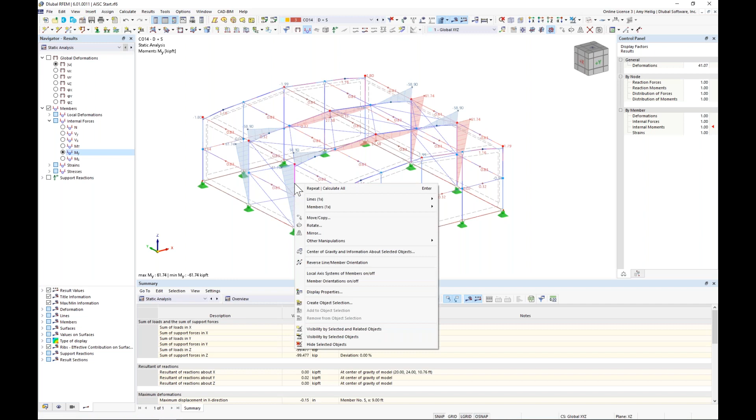If we're interested in seeing anything in more detail, we can right-click on one of these members, go to the members option, and turn on our results diagram. This allows me to take a look at some of these internal forces, deflections, and more detail along the member length. I can even look at different load combinations here, and I can add these to my printout report.

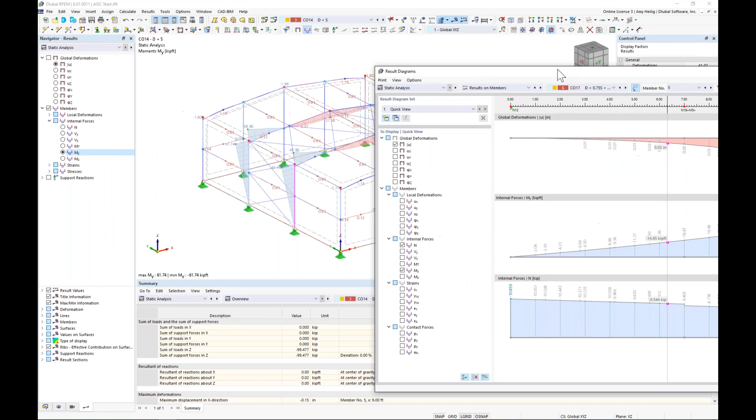We also can work concurrently within RFEM in the background. So any changes, and if I rerun the calculation, this result diagram, maybe open on my other screen, will automatically update.

As far as the static analysis results, all this information is available in table format as well. But we're also interested in the design utilizing the steel design add-on, which we can now select under our drop-down box here, steel design. You'll see the table's automatically updated to show my steel design, and I'm currently looking at the design ratios on the members.

I choose this tab here, design ratios on members. Within this table, I can click and notice everything is synced up in the background. That red arrow shows me exactly where my controlling internal force is, but I'm also looking at each one of the code checks according to all of the relevant chapters within the AISC, chapter E, F, G, H, and L for serviceability here.

If I'm really only interested in the controlling design ratio, I can just use my filter options up here to choose max instead. So now I'm only viewing the max controlling check for each member.

For each one of these checks, it's important to know that we can always go up here to our design check details. This is going to show me all of my code equations, my variables, the code references, and exactly how the cross-section was classified in much more detail.

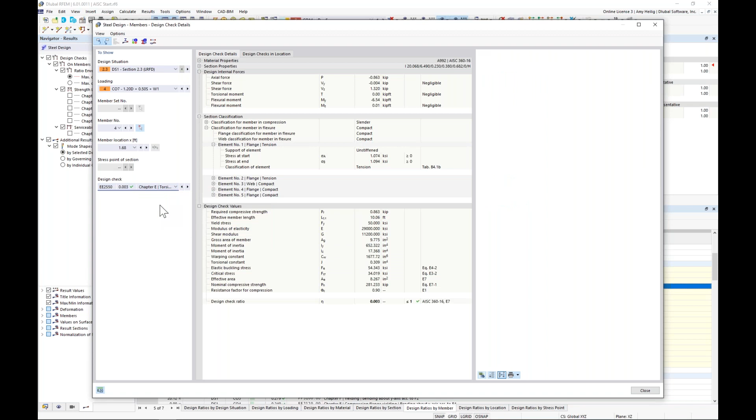We can even use this drop-down box to choose any one of the other design checks, and we can add this information to our printout report. We're trying to be as transparent as possible, even more than in RFEM 5, about exactly where all numbers are coming from.

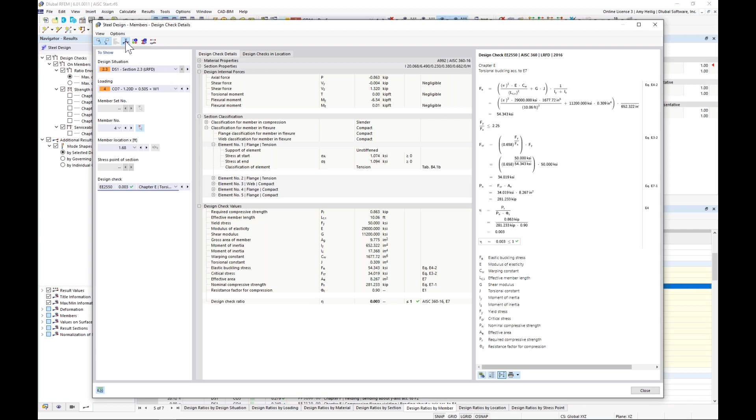This is very helpful in determining the background to the design check ratios. Additionally, for these members, we can visit the diagram in section. We can use our drop-down box here to view the stresses on the members, so we can see normal stresses, bending stresses, including shear, for this particular section at this X location.

We have the table format here for all of our output, but we also have the graphical view. Within this drop-down box, we're showing the steel design, and currently showing the max ratio for all of the design checks, but we can turn this off and view chapter E, for example, or if we want to view chapter F. All this is possible here.

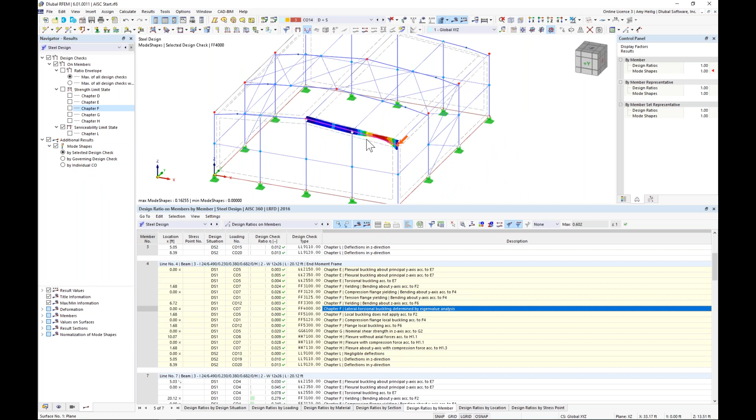You'll also notice that for lateral torsional buckling, we have additional options here for mode shapes. Remember, I chose the option to calculate an eigenvalue analysis, so this is the actual mode shape, the anticipated buckling mode shape for this member element and how my critical buckling mode was calculated. It's kind of nice to see that visually as well for each one of these members.

Hopefully that was a good introduction in order to do steel member design according to the AISC within our new program, RFEM 6.